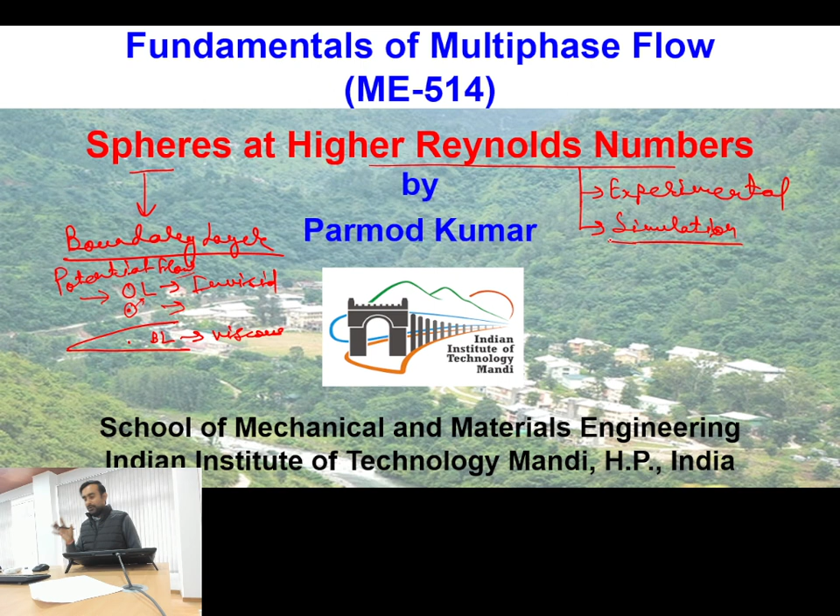So why are we calling these solutions approximate? Because we are not considering all the terms present in the system, but actually neglecting some of them. So first I will explain the boundary layer approximations, then we will move towards the simulation approach, and then see the different outcomes if flow is happening at higher Reynolds number on different spherical particles.

So we know that in case of boundary layer theory, typically this is a plate, and this particular wedge section has length L, with x increasing in this direction. Here, if your flow Reynolds number is very small, close to 10, then far away from this surface you will be having uniform velocity.

So that's why velocity value can be clearly written as u. And this Reynolds number, whatever I have calculated, this I have given subscript L. So the meaning is that length scale over here is nothing but considered equal to the length of the system. So rho u L by mu.

In this type of system, we know that because of the no slip boundary condition, if this solid surface is actually stagnant, just close to the surface I will be having zero velocity, and when I move away from the surface, my velocity will keep on increasing, and at a certain point I will be having velocity close to 99% of the free stream velocity u.

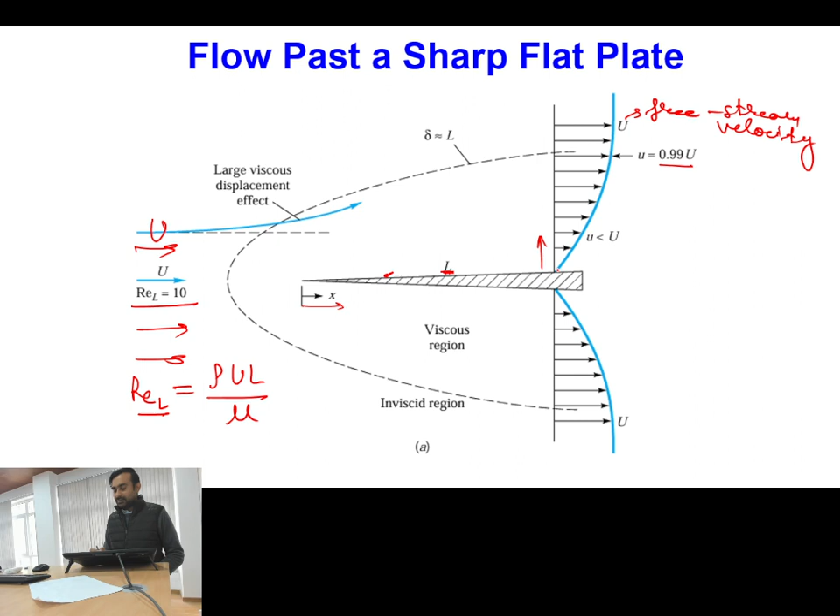So this velocity away from the surface is called free stream velocity. Now you have a variable velocity profile where velocity is actually varying in the transverse direction, and outside this you have almost the same value of velocity. So within this region you have slow down of the flow because of viscous dominance effects. That's why I call this region of the flow viscous region, and outside this I call the flow region inviscid region.

Whenever my Reynolds number is very small, I will find that whatever streamline is moving out in the inviscid region has to bend through a very large portion. So it will be having large displacement because of the presence of viscous dissipation within the system. So this is one assumption.

Then next we have very high Reynolds number. In the previous case my Reynolds number was close to 10, and in the next case my Reynolds number is actually 10 to the power 7. So extremely high Reynolds number.

In this scenario, your boundary layer thickness is actually very very small. The boundary layer is just adhered to the surface and its thickness is very small, meaning delta is very small in comparison to the total length of the plate. So if the boundary layer region is very thin, then whatever streamline is moving away from the boundary layer region will have a very small displacement effect. So displacement of the streamline in the inviscid region will not be significant.

Particularly when your Reynolds number is very high, close to 10 to the power 7, we will not be having fully turbulent or fully laminar region from left to right. Whenever we move along the length of the plate, the point at which my Reynolds number becomes greater than 3 into 10 to the power 6, there I will be having transition from laminar region to turbulent region.

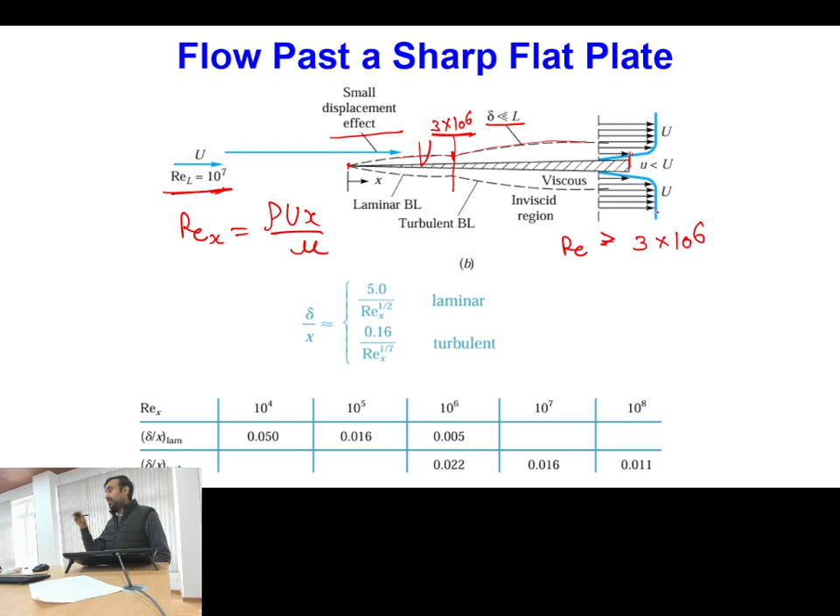It will be following different profiles in different parts of the boundary layer. Typically very close to the boundary it will be following a linear profile, then after that a logarithmic profile, and after that a power law profile. But in the majority of cases, the simplified assumption is to consider a logarithmic profile because it is prevalent in the majority portion of the system.

So that's why a detailed understanding of turbulent flow is needed, but the point is the nature of the velocity profile will be different from that of laminar flow.

One interesting point is that this is the critical Reynolds number at which flow changes from laminar to turbulent. But this critical Reynolds number is actually a very idealistic situation, only true if at your inlet the flow is perfectly straight.

If you have small perturbation in the flow at the inlet, then before this critical Reynolds number you will be having transition from laminar to turbulent flow. So whenever we do practical consideration for boundary layer theory, we consider critical Reynolds number to be 5 into 10 to the power 5 for a flat plate case.

Ideally it should be 3 into 10 to the power 6, but practically we will not have perfectly aligned free streams. Free streams will be having certain perturbations as they approach the solid surface, so in practical scenarios the critical Reynolds number will be 5 into 10 to the power 5.

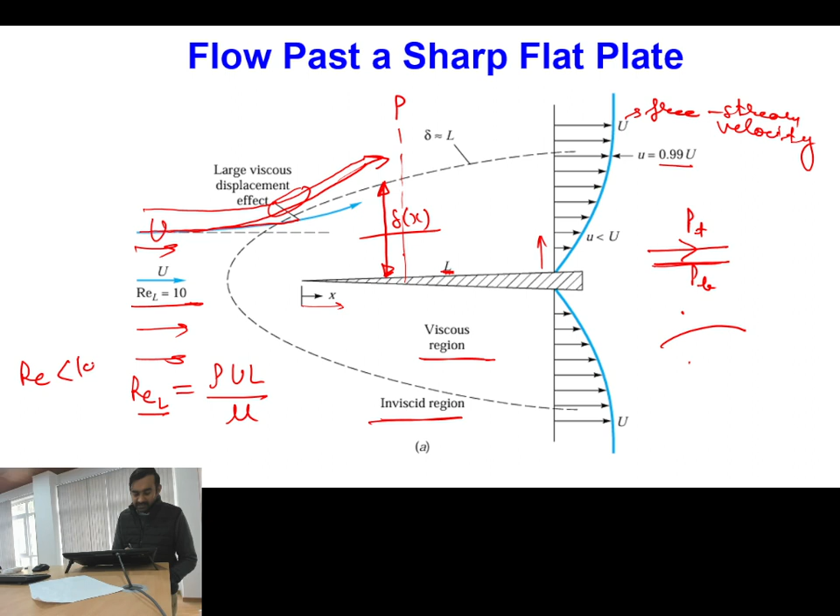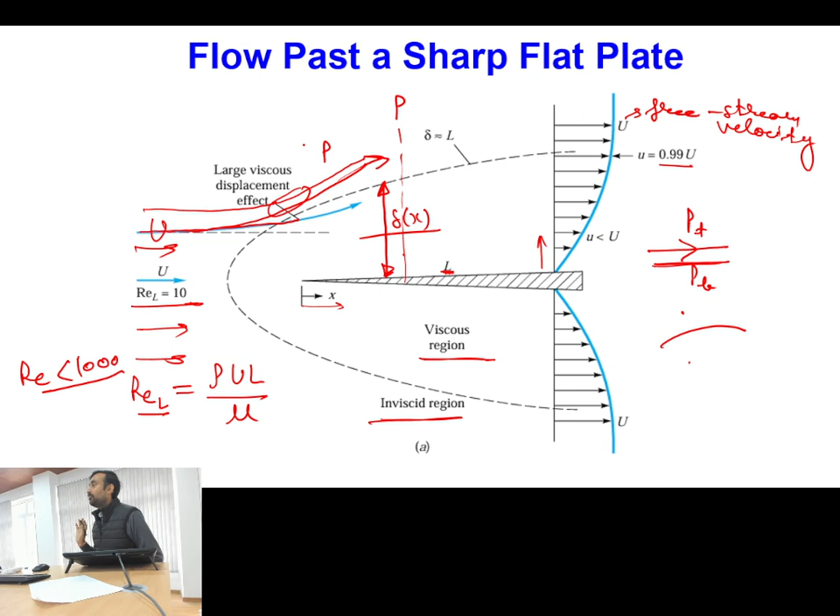If I consider my Reynolds number to be less than 1000, you will be having large deformation of the streamline in the inviscid region. Because of this large deformation, whatever pressure you calculate outside the boundary layer and within the boundary layer cannot be accurately considered equal. That's why in that range, boundary layer theory will not be applicable. So whenever you apply boundary layer theory, it is always applicable for Reynolds number greater than 1000.

Second important point: whenever we apply boundary layer theory, it is not applicable at the start point. If you see the boundary layer theory approximations, and based on that calculate the wall shear stress, you will find at the starting point your value of shear stress will be infinite. If you have infinite shear stress at one point, it means you cannot move any system in a flow field.

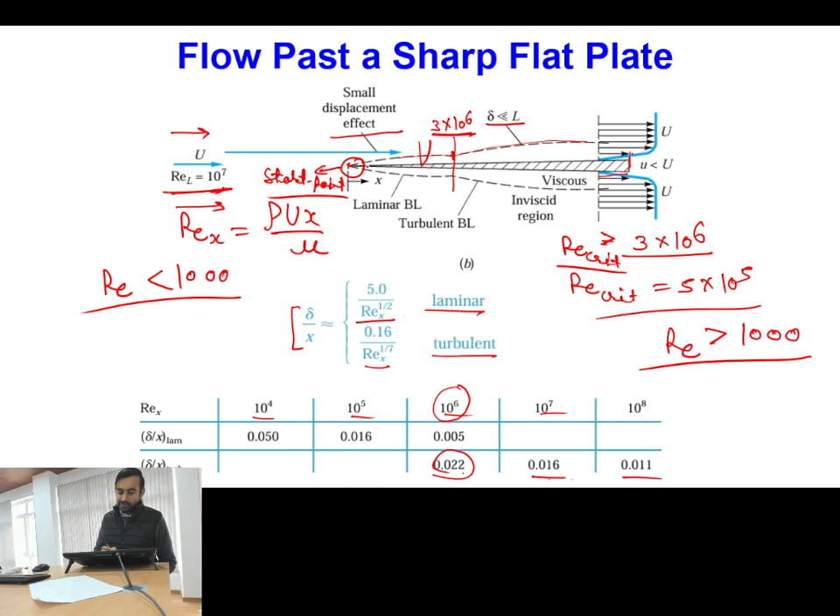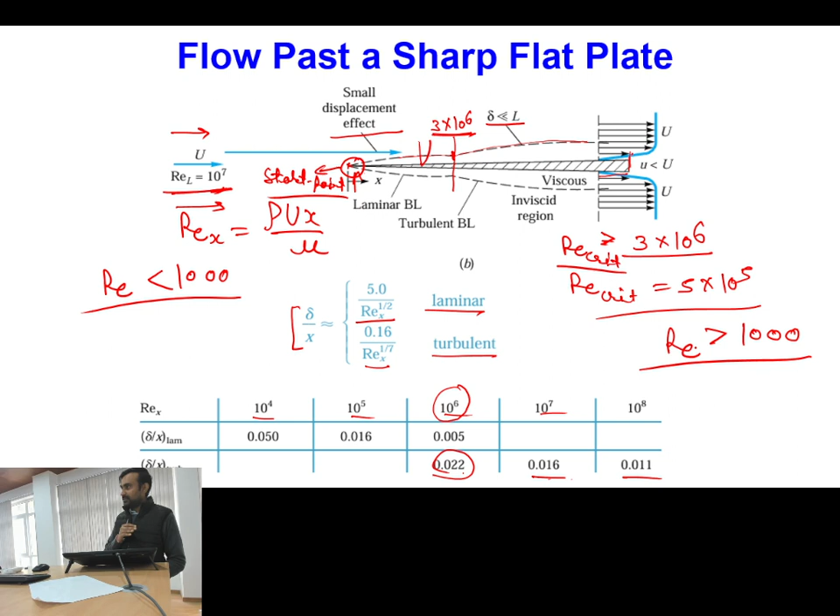Because to generate infinite stress, you would have to provide infinite power to overcome that infinite shear stress. So another limitation of boundary layer theory is that it is not applicable at the starting point - it applies after some very initial starting portion. So you should know very clearly what are the limitations of boundary layer theory: it is not applicable for Reynolds number less than 1000, and not applicable at the starting tip of a system.

Now, analysis of boundary layer theory is very simple for streamline bodies, because in that case the boundary layer profile is very smooth. But if we consider blunt bodies like cylinders and spheres, things change. Here the Reynolds number is calculated based on the diameter of the body as the length scale, so we write it as rho u d by mu.

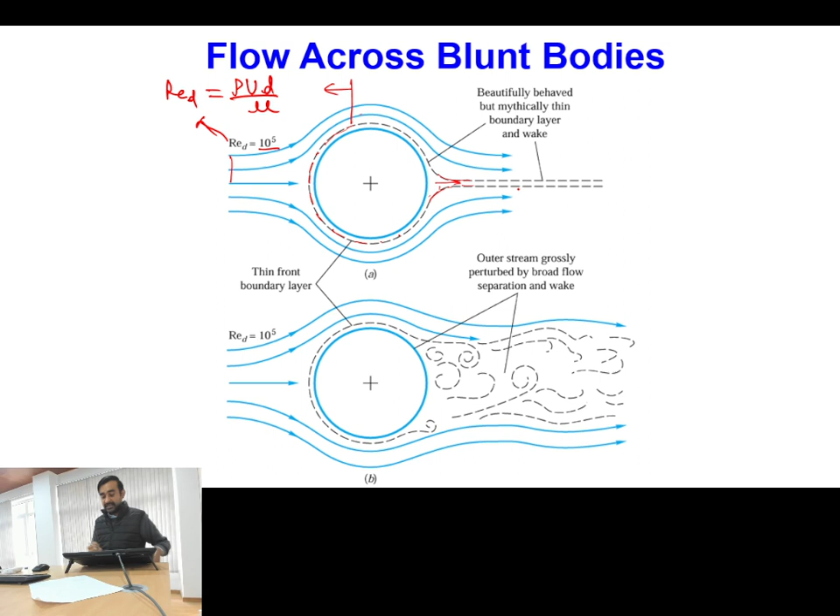So in an idealistic system, one can simply assume we will have a very smooth streamline structure, and whatever pressure loss we have in the upstream section, the same pressure gain we will have in the downstream section, resulting in a well-behaved wake structure.

Okay, but this is something which does not happen in reality. In reality, if you consider the same Reynolds number, you will find that your streamline is only passing up to the front portion like this, and after that in the rearward portion you don't have a clearly defined boundary layer. So you have a very thick boundary layer portion.

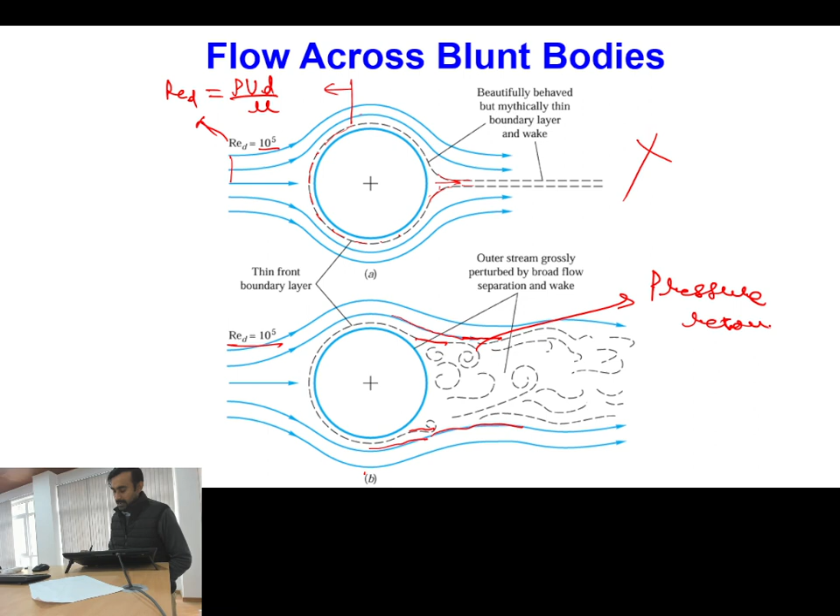In this thick boundary layer portion, you will find that whatever streamline is passing through this region is not bending too much. If it is not bending too much, I will not be having pressure recovery here. So pressure recovery will not occur, and this type of situation is nothing but called flow separation.

So what is happening? Flow is actually separating or leaving from the solid surface. It is not attaching to the solid surface.

This flow separation, initially for very small Reynolds numbers, almost starts at the stagnation point at the rear, and the location of this flow separation keeps shifting towards the upstream direction upon increase of Reynolds number in the laminar regime. After that, whenever we enter the turbulent regime, it again shifts towards the rearward direction. How it shifts we will see in detail, but one simple point is...

...that I will not be having a very smooth structure. Because of this, boundary layer approximation will only be applicable up to the point where flow is actually attached to the surface. But when flow is away from the surface, we don't have an attached flow situation and a well-defined boundary layer, and we have formation of a large number of vorticity.

So here you can see a large number of vortical structures are actually present in the flow. These are called a chaotic wake structure. In this chaotic wake structure, your calculation of pressure and velocity field cannot be obtained from the boundary layer theory.

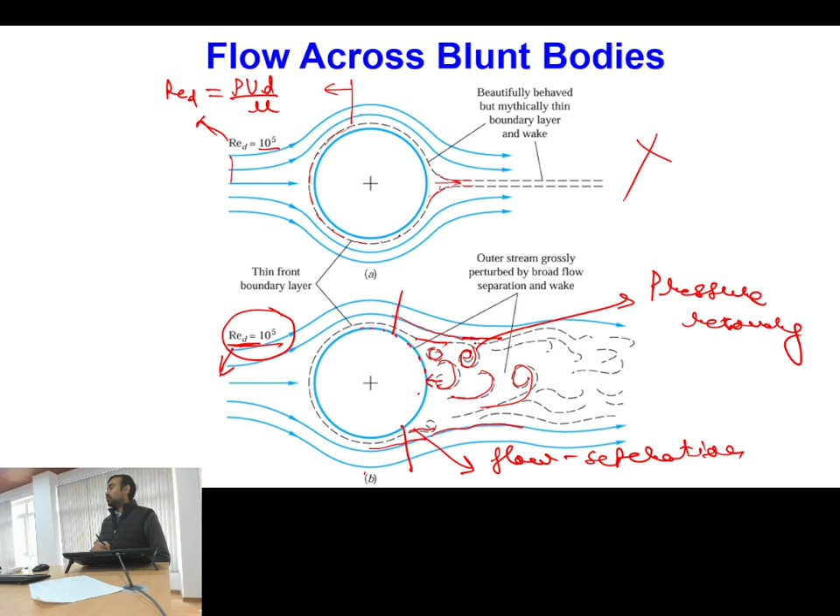So local Reynolds number will not influence this region. When you define the boundary layer thickness, you will actually define it simply based on other parameters without non-dimensionalizing it.

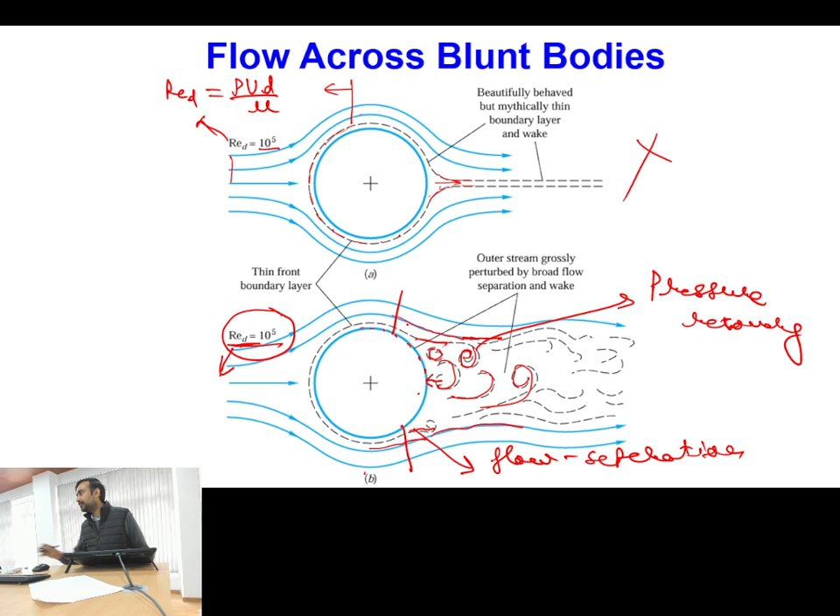So whenever we solve the boundary layer approximation, let us first simply talk about a two-dimensional flow over a flat plate. This is a plate and over this flow is happening, so you will have formation of a boundary layer region here. If I have to solve this type of two-dimensional situation, I can fix my x coordinate system in this direction and y coordinate system in this direction, and this is my free stream velocity.

In this case my flow field is two-dimensional, incompressible and steady, so I will have one continuity equation and two momentum equations, x and y momentum equation. But what I can do now is make certain approximations.

I can say that if my boundary layer is thin, and because of the thin boundary layer there will not be much displacement of the streamline. If there is not much displacement of the streamline, my streamlines will be almost horizontal and all the velocities will be dominant only in the x direction.

Because if your streamline is having significant displacement, then your velocity vector will be having significant horizontal and vertical components. But if your streamline is close to horizontal, then your velocity field will be majorly dominant in the x direction, so my v will be very small in comparison to u.

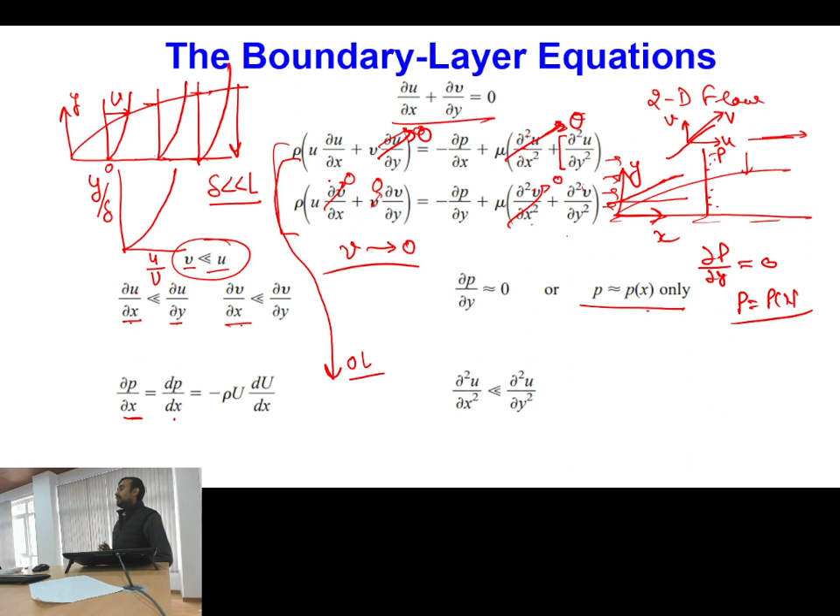So ultimately - no, these will not be 0. Particularly this will be 0 and this will be 0, but del u by del x will not be 0, because whenever you are moving in the x direction, if you have a pressure gradient present from this point to this point, what will happen? There will be a change in your velocity value in the x direction.

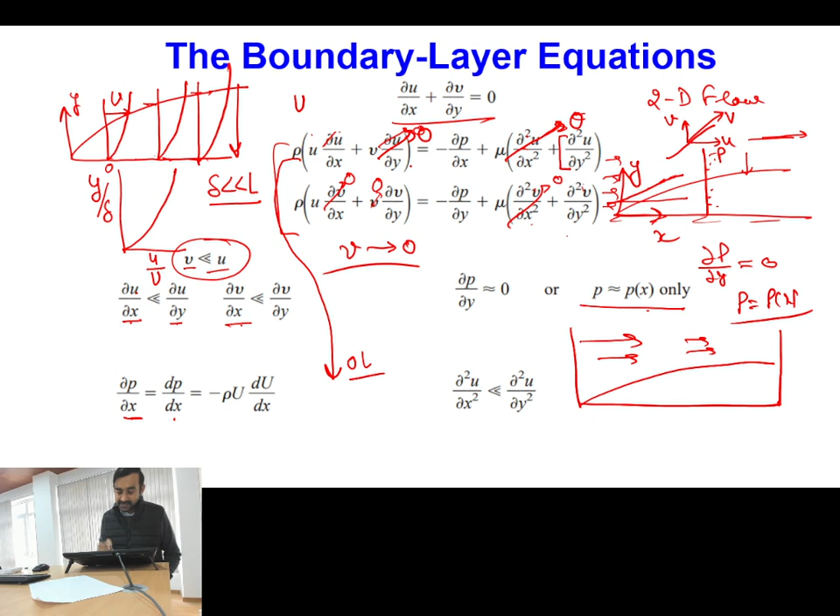So that's why outside the boundary layer, what I can write in place of velocity, my velocity will be capital U, because velocity is nothing but free stream velocity, and at the same time this free stream velocity will be a function of x. How can this happen? For a flat plate it may not appear that outside the boundary layer velocity is changing.

But if you take a wedge section like this, what will be happening? Your flow streamline is coming like this and then it is bending. Because of this bending, here I will be having acceleration of the flow.

So because of the acceleration of the flow, my velocity value will actually be changing as I am moving in the x direction. So my free stream velocity, at this point it is u, but whenever I am moving towards the solid surface, the value of u is changing as I come closer to the surface. So this u is a function of x. Is this point clear? So u is not constant, it can be a variable with x direction only.

So that's why in this x momentum equation, outside the boundary layer, small u I can replace with capital U, but capital U can vary in the x direction but not in the y direction. At a particular x, in the y direction it will remain constant. So that's why the x momentum equation outside the boundary layer will give me del p by del x, which can simply be written as dp by dx equal to minus rho U into dU by dx. Is this point clear?

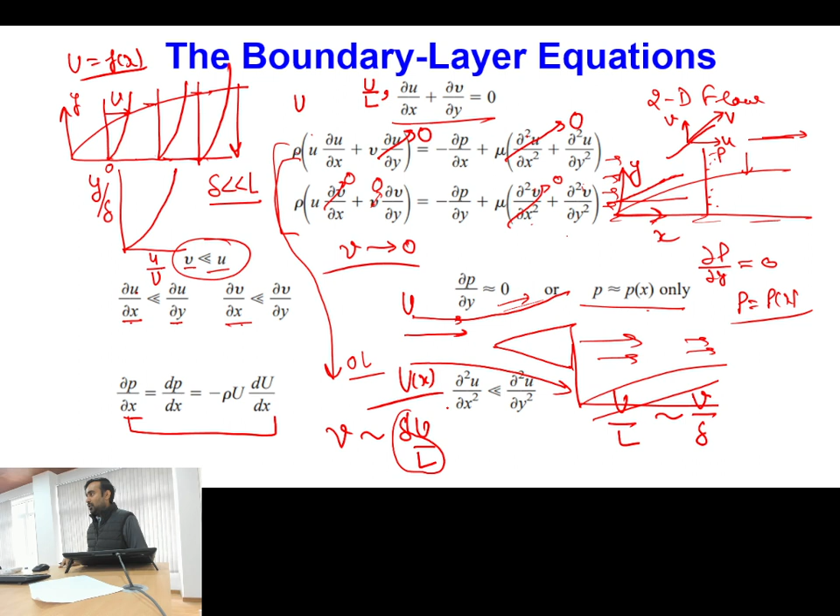So once I invoke all these assumptions, what will be happening? I will be getting a simplified set of equations. What are these simplified set of equations? A continuity equation. In terms of momentum equation, from the y momentum equation I was having only this term del p by del y equal to 0, which means the y momentum equation is completely gone. So I will be having only the x momentum equation.

So in the x momentum equation, I have u into del u by del x plus v into del u by del y, and this dp by dx I have replaced with capital U into du by dx. This du by dx can be simply calculated by applying the Bernoulli equation at different locations outside the boundary layer, because outside the boundary layer my flow is inviscid, so I can apply the Bernoulli equation.

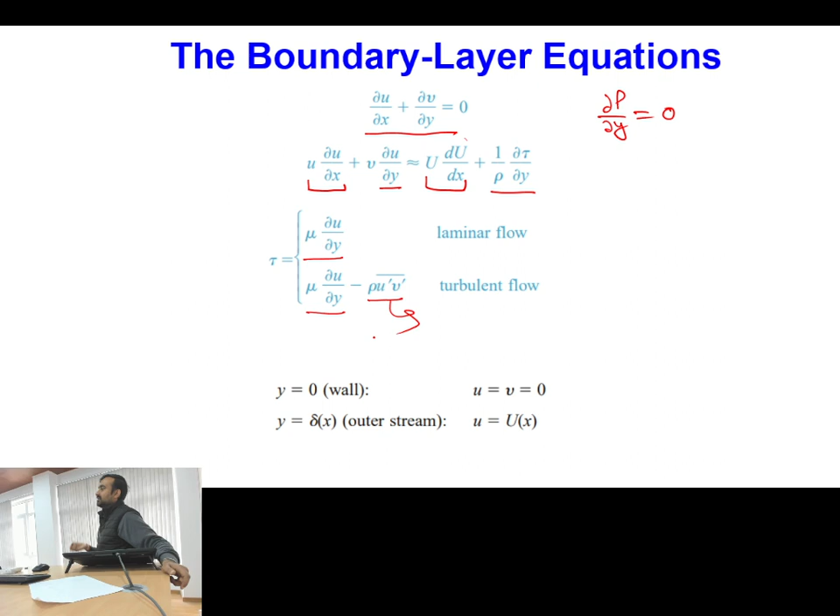And then I will be having, of course, the viscous term which is written in terms of del tau by del y. If flow is laminar, then it will simply be equal to mu times del u by del y. If flow is turbulent, then it will be mu times del u by del y minus rho u dash into v dash. What are u dash, v dash? These are the fluctuating components which lead to additional stresses in the flow, which are called Reynolds stresses. Is this one clear?

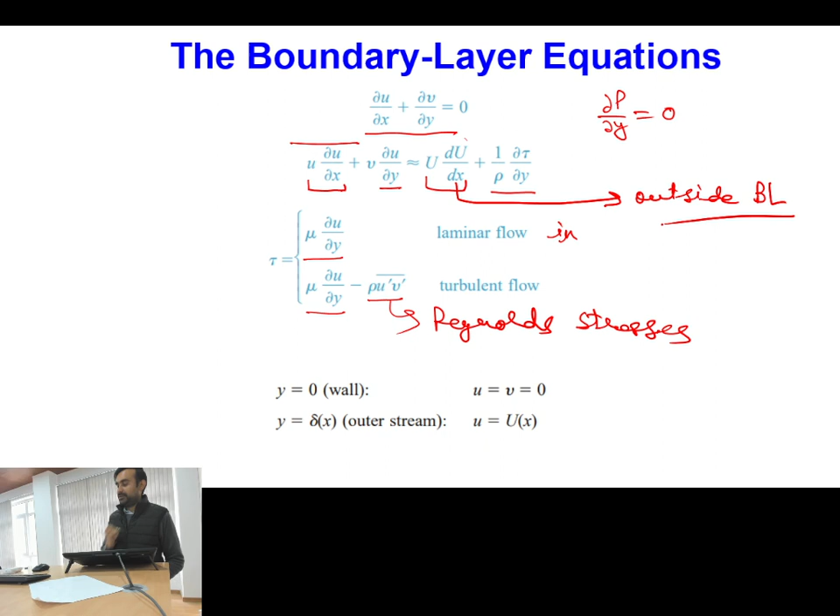And u is a function of? No, this is not outside the boundary layer, this is inside the boundary layer. Yes, this is also inside the boundary layer. Only this particular term I can calculate from outside the boundary layer, because capital U is applicable outside the boundary layer. Is this one clear?

All clear with this idea? So this is just a revision, because you might have already studied boundary layer theory in your BTech as well as the advanced fluid mechanics course. So I think this is only a revision part.

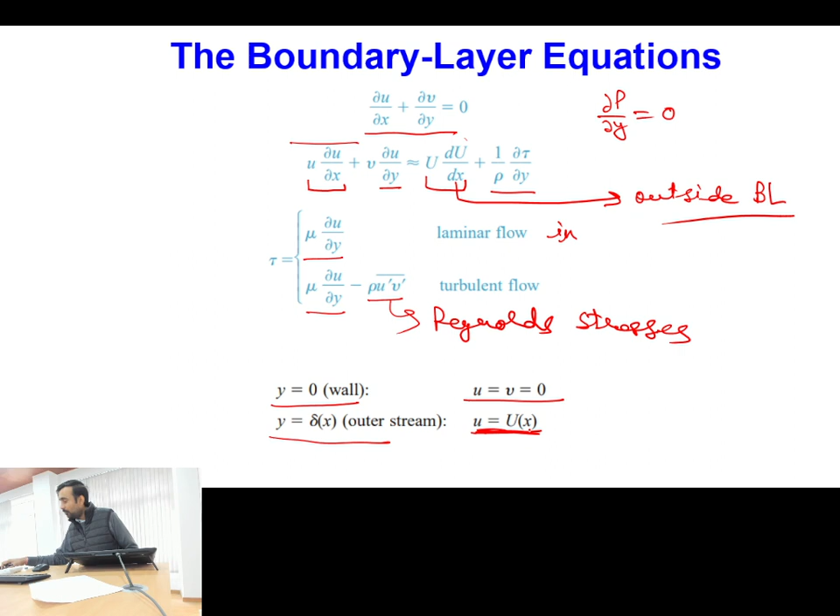Then at y equal to 0, what will be the boundary condition? If you have a solid wall, then impermeable and no slip boundary condition, and at the outer location when y is equal to delta x, your velocity is nothing but equal to free stream velocity, but this is a function of x, so at different values of x your free stream velocity is actually changing. Then I had given the second approach that I will not discuss now.

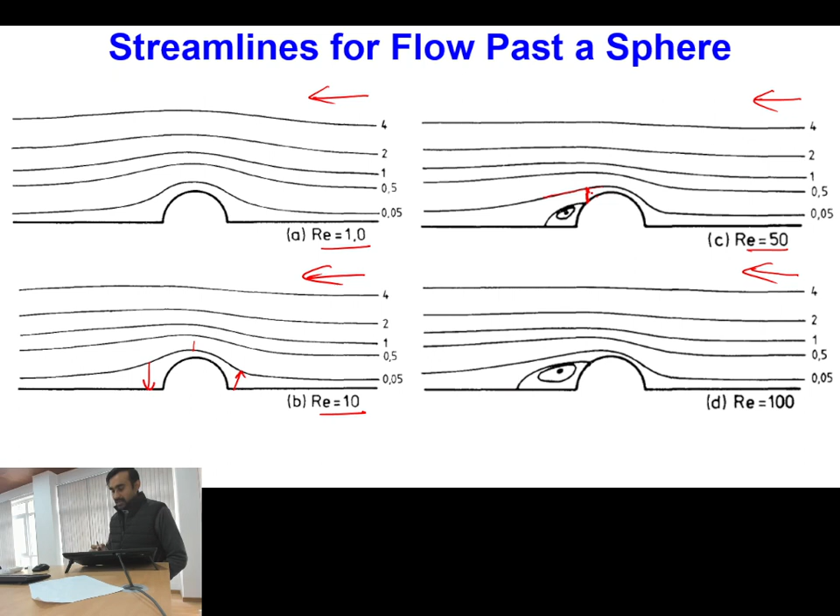When Reynolds number increases to 50, the streamline actually leaves the surface very early. At this point the streamline just leaves the surface, and then we have formation of a vortical structure below this streamline in the rearward portion of the flow.

Upon further increase of Reynolds number, this streamline leaves even earlier, and this vortical structure is actually growing in size. So we have the formation of a wake, and the strength of this wake and its extent is actually increasing as we increase the Reynolds number.

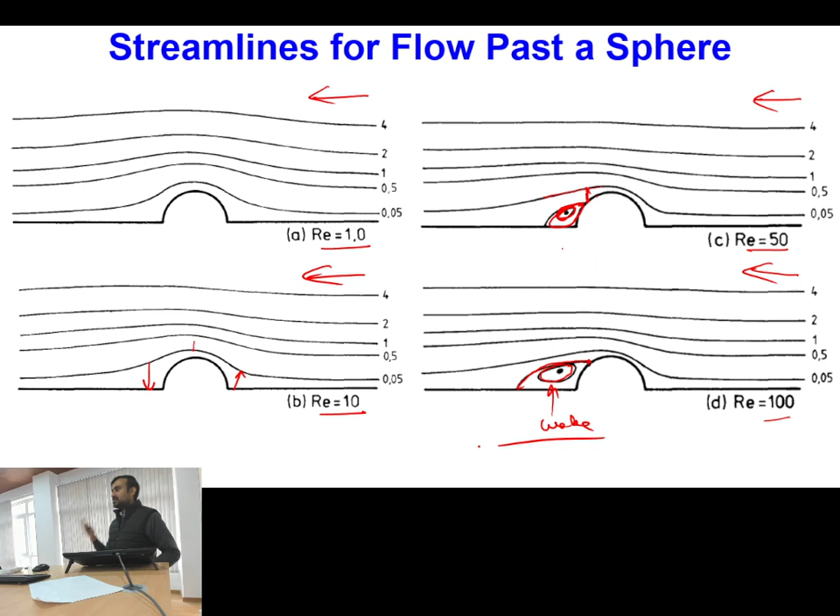When Reynolds number equals 10, the vorticity field is being diffused towards the downstream direction. This portion has actually shifted more towards the downstream direction, meaning whatever vorticity generation happens at the front portion is actually extended to the downstream direction, and this is being extended away from the surface.

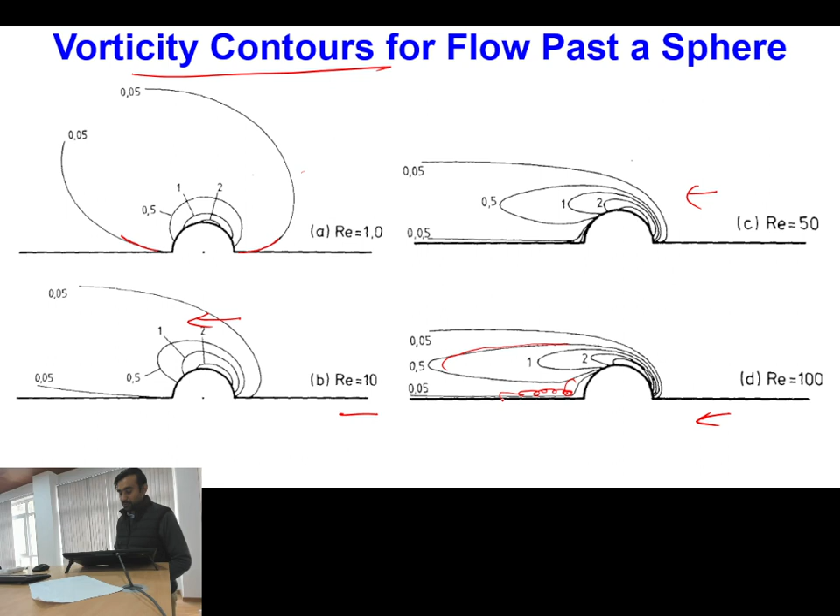Close to the surface we will have some formation of other small vortical structures. This is the typical representation of dimensionless vorticity at the surface of a sphere, plotted in terms of angle.

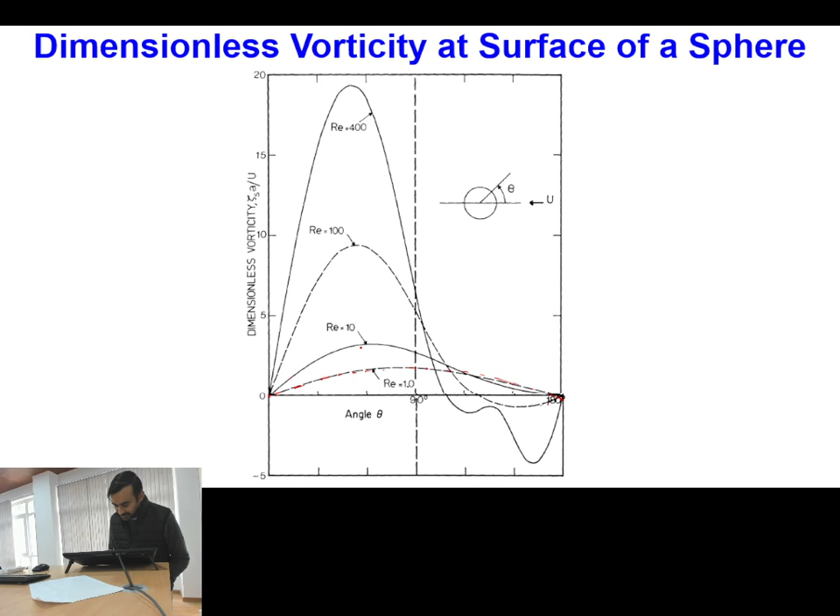So when you have angle 0 and angle 180 degrees, corresponding to Reynolds number equal to 1, this is the line, and vorticity is not having much change. But in this case when Reynolds number is 10, vorticity near the rear portion is actually becoming negative.

When Reynolds number is further increasing, the change in sign of the vorticity at the surface becomes strong, which is because of the formation of vortical rolls just behind the rearward surface. Further increase of Reynolds number gives very strong vorticity in the upstream portion, and behind you will have very negative vorticity with strong magnitude.

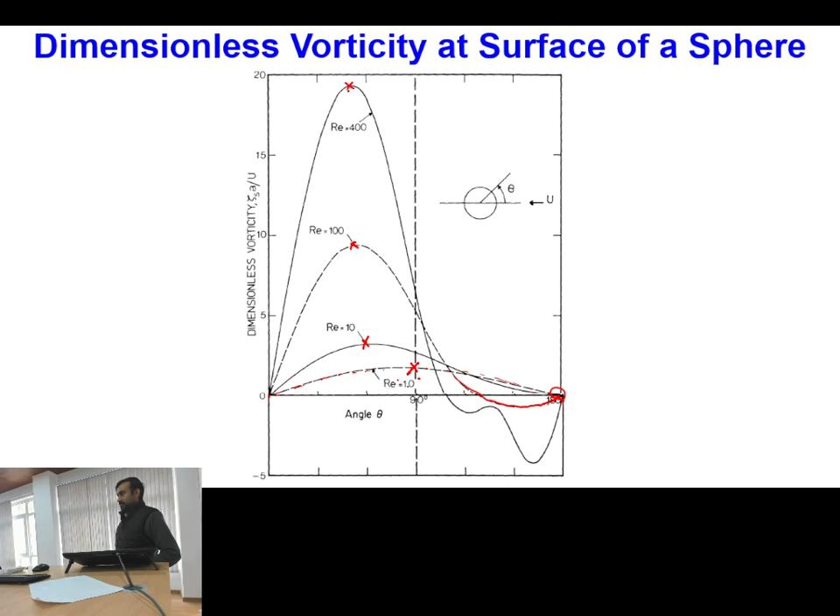One simple point to observe is that the peak point of vorticity is just at the middle for Reynolds number equal to 1. This peak point has shifted towards the upstream direction as you increase Reynolds number. So upon increasing Reynolds number, the maximum magnitude of vorticity at the surface is increasing, while its peak point is shifting towards the upstream direction, so you have occurrence of highest vorticity at lower angle positions.